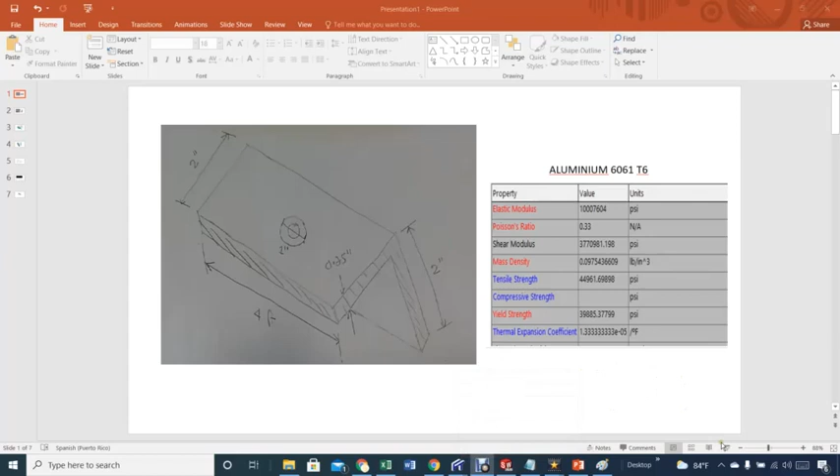All right, so here we are. We're going to design our L beam. Let's put this on slide mode. Let's see, there we go.

So here we are. We are designing this L beam in this fashion. Both ends of this aluminum beam will be fixed, and there's going to be a hole right through here where we'll put a bolt, and that bolt is going to be holding about 1,000 pounds weight. The dimension of this beam is 4 feet in length, and it's a 2 by 2 with a thickness of a quarter of an inch. It is an aluminum 6061 T6 with a yield strength of about 40,000 psi.

So that's basically what we have, and we want to see whether this L beam, the way it is with the properties and its characteristics, are enough.

This here is sort of like a washer. The bolt goes right through here, right through the hole, and let's look into that. This is another view of what we are saying. Here is kind of an eyebolt that is going to be connected right through here. The diameter is about 3/8 of an inch, and the washer is about 1 inch. So we have 3/8 right here, the diameter, and 1 inch right here, holding this 1,000 pounds.

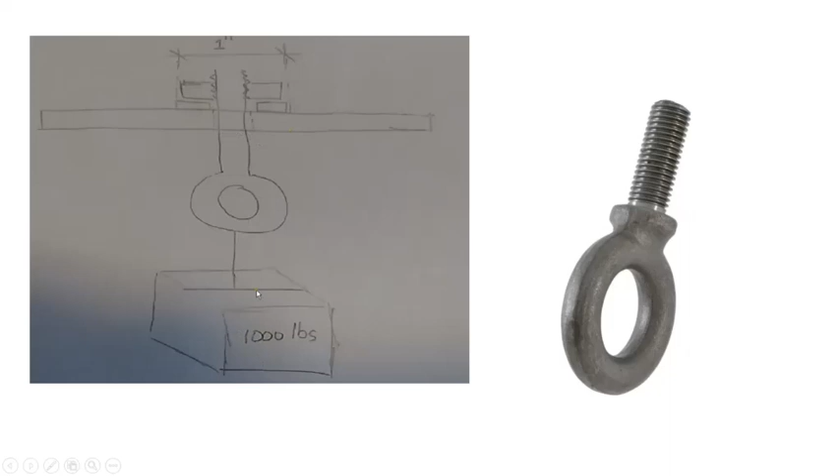So that's basically the idea. And again, check this out, right? Because gravity goes this way, so that when we do our analysis, we don't get lost. All right, so basically the idea is to do the analysis on SolidWorks and see what the stress will look like when we submit our L beam to that force.

So, deflection. Talking about deflection, depending on what code you look at - this is kind of interesting - the International Building Code calls for L/240 for deflection. Obviously there's some important conditions where we want to be sure there's pretty little deflection or none at all, like supporting plaster. Then that has to be L/360.

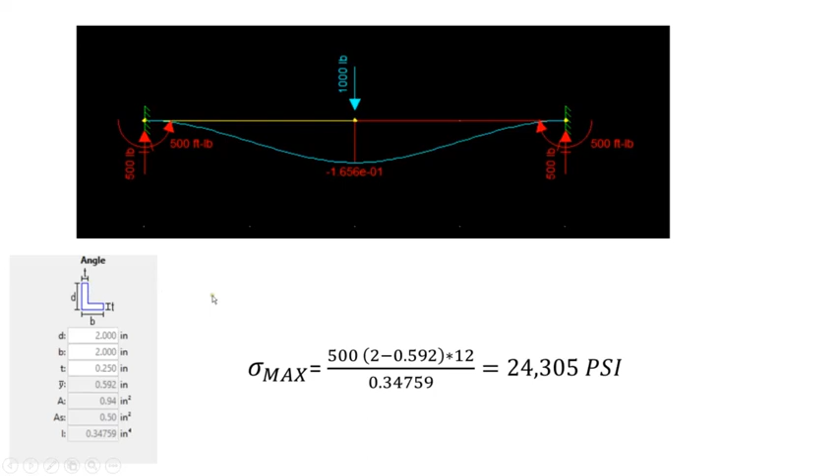Now, if you do the analysis for your stress, that would be about 24,000 psi. Based on the fact, remember, the centroid is 0.592, and the maximum - so that would be somewhere here. So the maximum distance is up to here. So this part will be subjected to very high stress that will come out to 24,000, which is kind of close to the 32,000 that we got for

the SolidWorks analysis. Remember, gravity is going this direction. So you think about it, at the end of this line here, there's going to be a lot of tension. And so tension here, and here in this part will be compression. So you have tension, more tension, and finally compression right along this line.

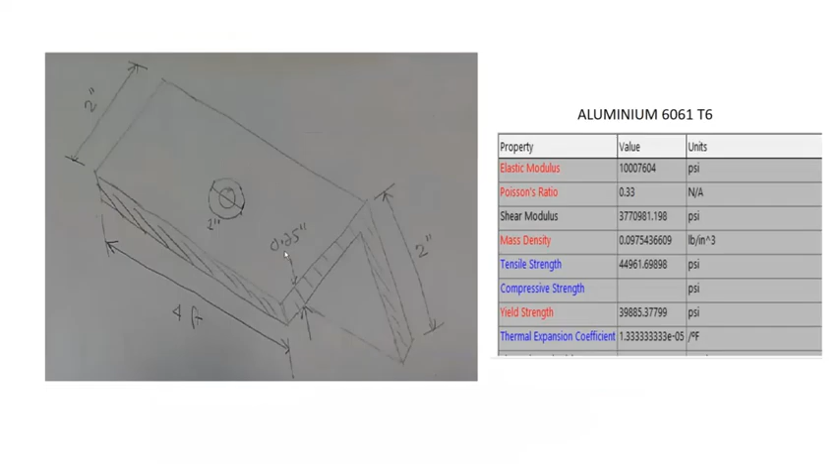All right, so let's see. Anything else that I should say? Well, actually, nope, we are in pretty good shape. What we should do now is take a look at how we do this type of analysis within SolidWorks. Let's do that. Oh well, here we are in SolidWorks.

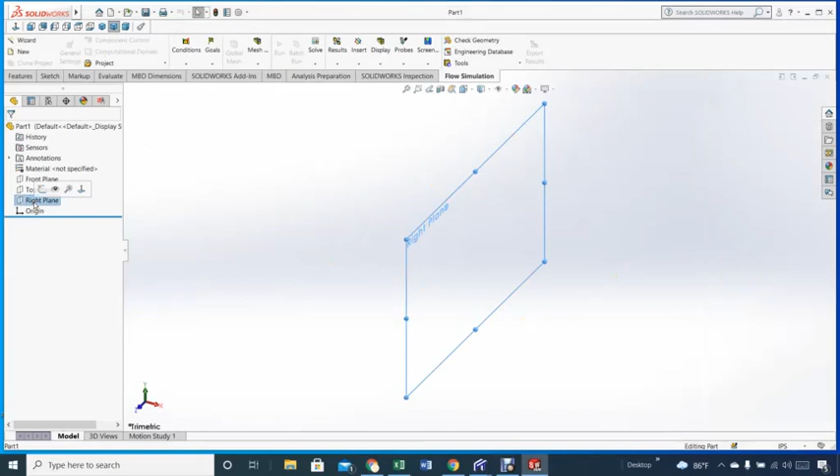Let's see if I can construct my L-beam. Let's see what would be a good start for this. Maybe a right plane - yeah, that might do. Right plane, so let's start with that.

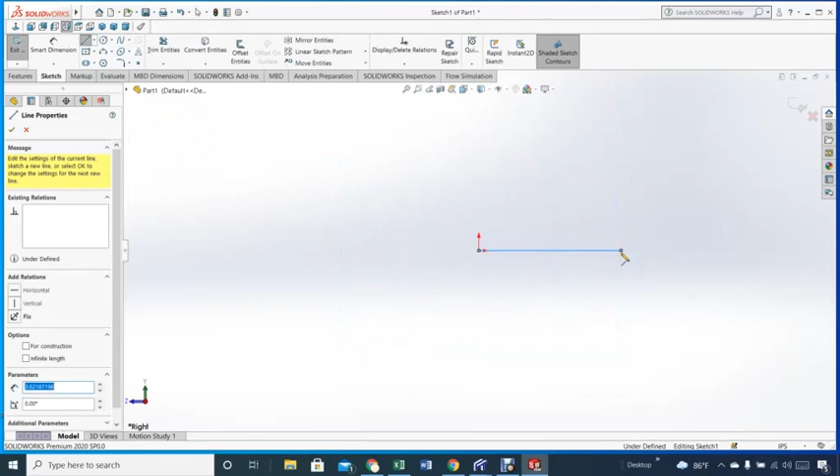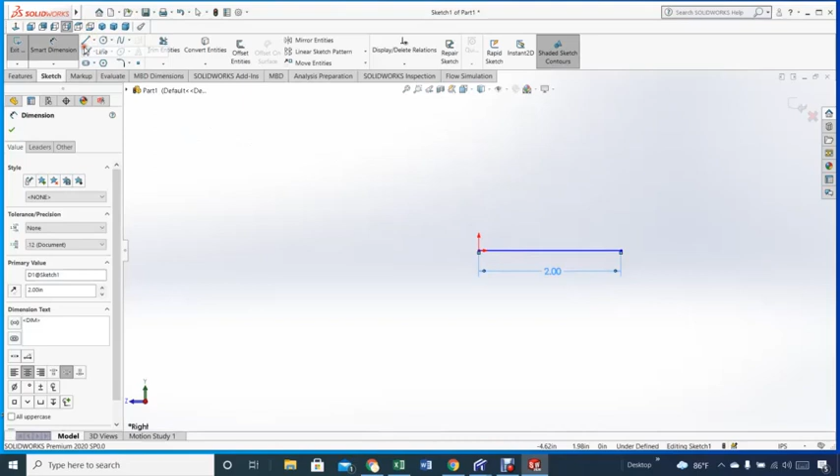And let's see, let's put a line. Let's see how this will work. All right, let's say that line will be about 2 inches, and we do another one from the center up.

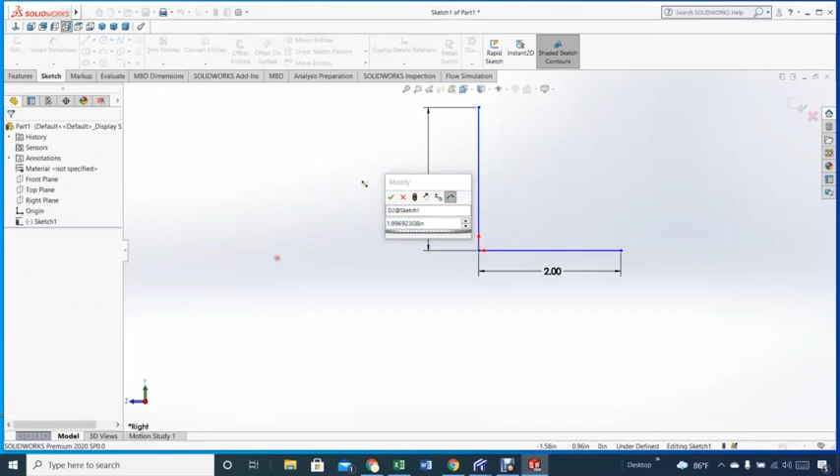All right, I think that's 2 inches as well. Let me double check. That looks good. Yeah, 2 inches. Now, oops, what happened here?

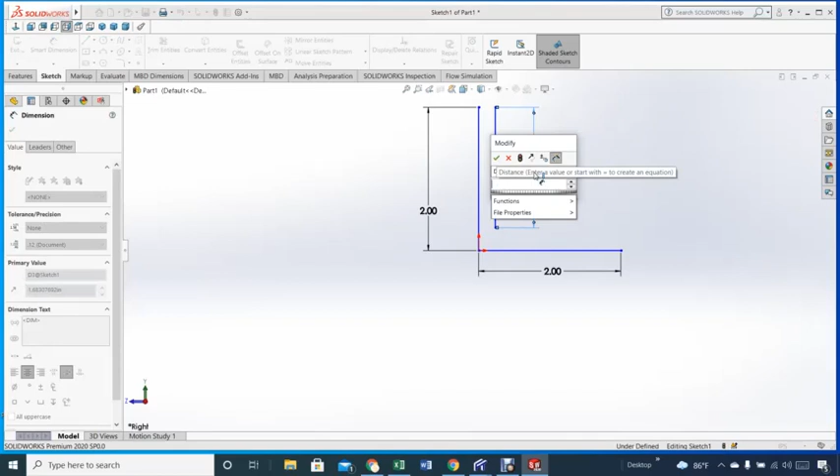Now let's throw another line here. And good. Let's leave it somewhere here. That line, the length of that line should be, since we want a distance from the bottom of 0.25, that line should be 1.75 in length.

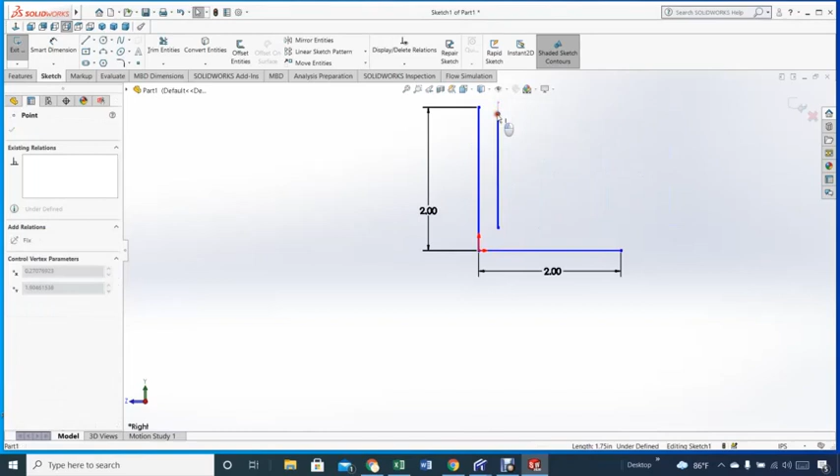And so let's move the line. Let's see if I can move it, because somehow it's fixed here. Always gives me some trouble. Let's delete the line again. Let's see if I can move it. There, but somehow, let me see if I can get this right.

That's the problem. That one should be 0.25. And now let's see if I can move this up. Oops. There we go. Now we're talking. So close. Let's close the guy. Let's see if I finish it.

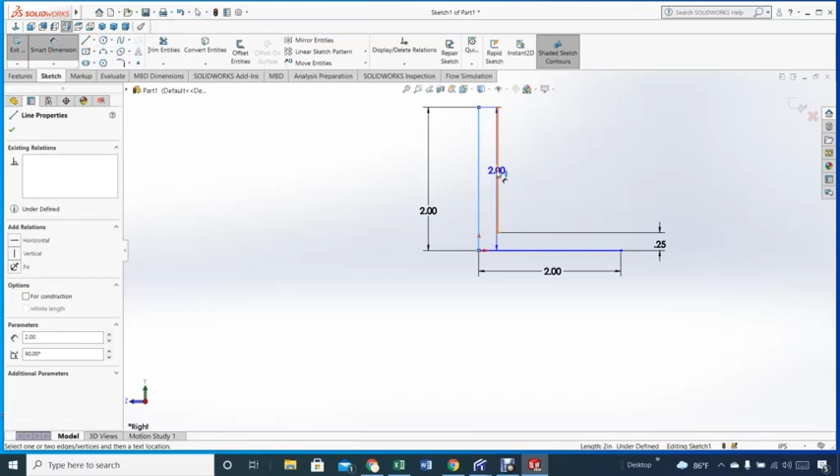Now the only thing that I need before doing that, actually, let me be sure that this is where it's supposed to be. That should be 0.25. And it looks good.

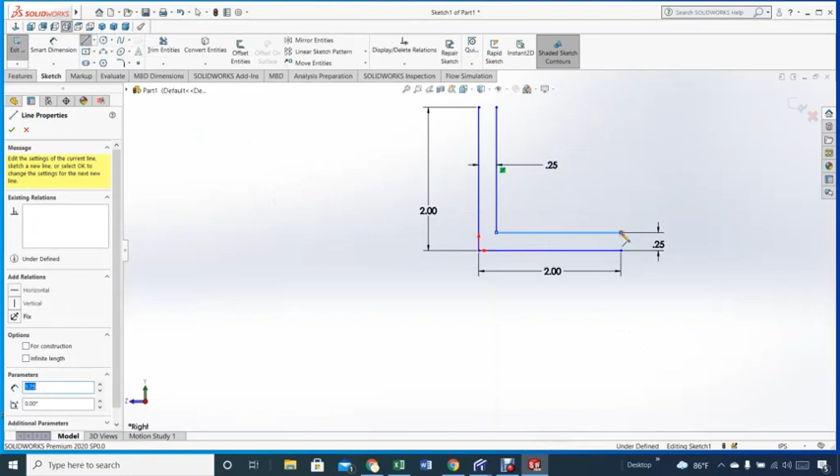Now another line, up to there. And now another line up to here. I think it's getting almost done. Another line from here to here. Excellent. Now it's close. So we got all the dimension. It's about 1/4 inch thickness. And everything looks good, so we accept that.

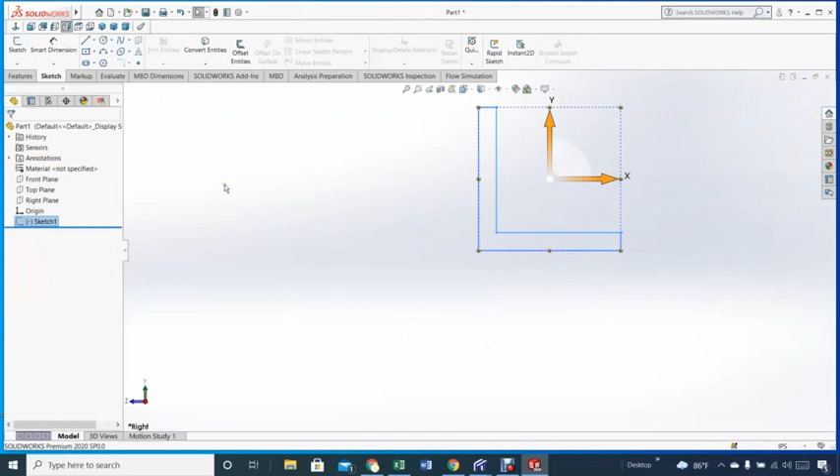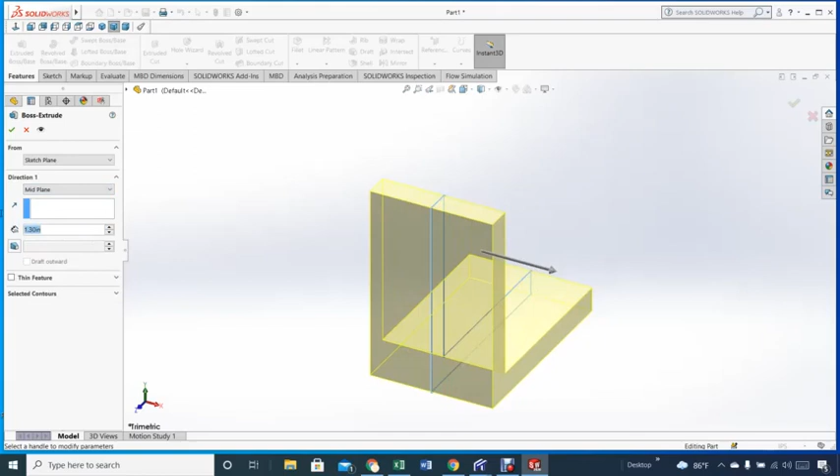And how about if we go feature, extrude, and it can go either way. Actually let's keep, I don't know, mid plane, and that would be 2, that would be so it's going to be 4 feet, meaning that we should go, like for example, that would be 24 inches. Now let's get this side to fit, so I know what I'm doing. It looks good, so we accept that, and we rotate again.

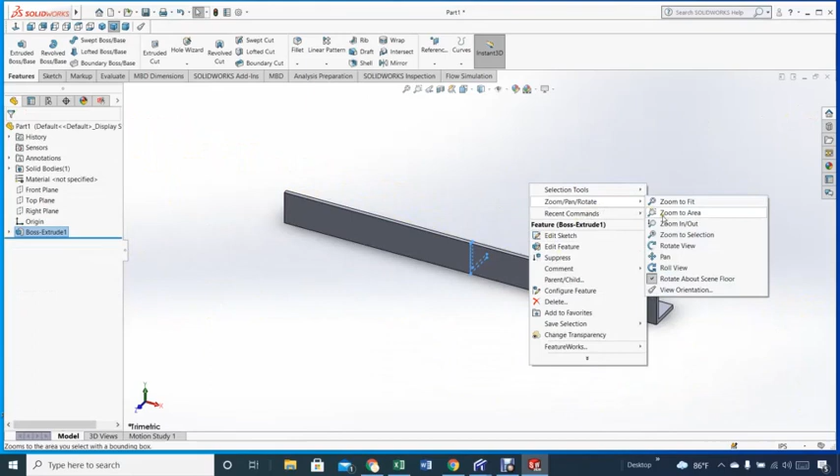Let's see how this looks like. Yeah, we got our beam pretty much designed the way we want it.

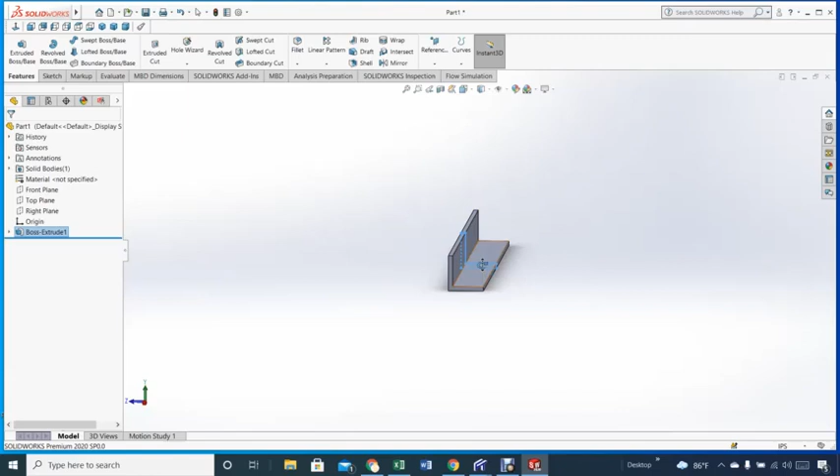Well, the issue is that the force here will be in this direction here, in one of the beams. So this beam will be fixed, and this is going to have a force going in that direction. It doesn't matter what is up and down, just to be, but what I'm saying is that you have to be sure, depending either side, because they are equal. So like for example, this side would be, if this length here is longer, then you have to be careful where is the hole according to your original drawing. In this case it will not matter. So I can put it here or here, where the bolt, the eye bolt, will be, hook up for the weight, for the force that will suffer when we do the analysis.

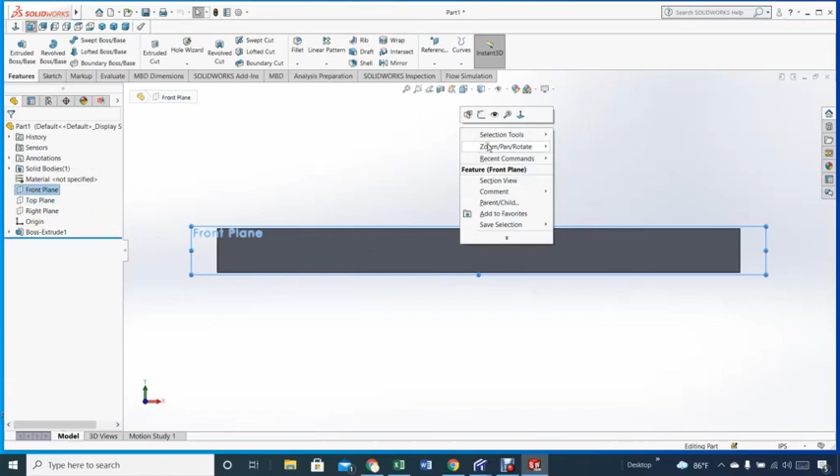Now, let's see. And this is the part that is important. Before I do anything, let's go top plane. Let's see, front plane. I think the front plane will do. Let's see, rotate. Yeah, front plane will do.

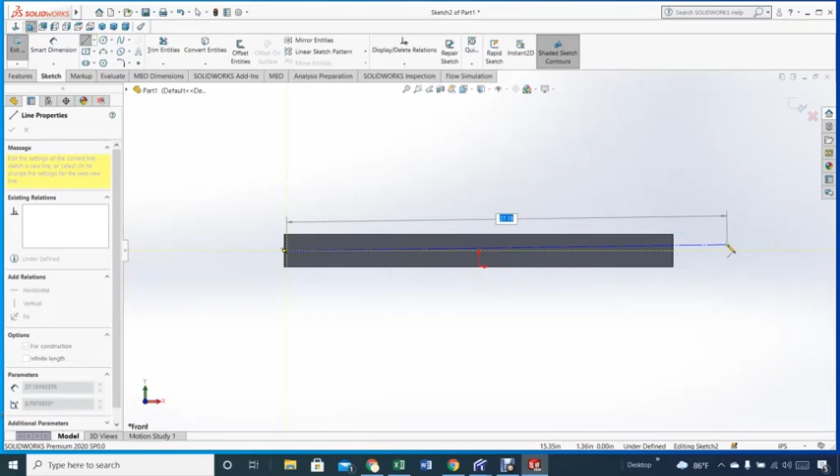And let's work on the front plane. Let's do sketch on the front plane, and let's add some line here, just so I know what I'm doing. Good. Now let's see. Actually this will look better if I get this right where it's supposed to be. Let's see if I can fix this.

Good, how about this one? There we go. Now I have the middle, and that will do, because then the next part will be right here. We're gonna add a circle right in the middle. That will do. And so that one, actually let's make this bigger so I know what I'm doing.

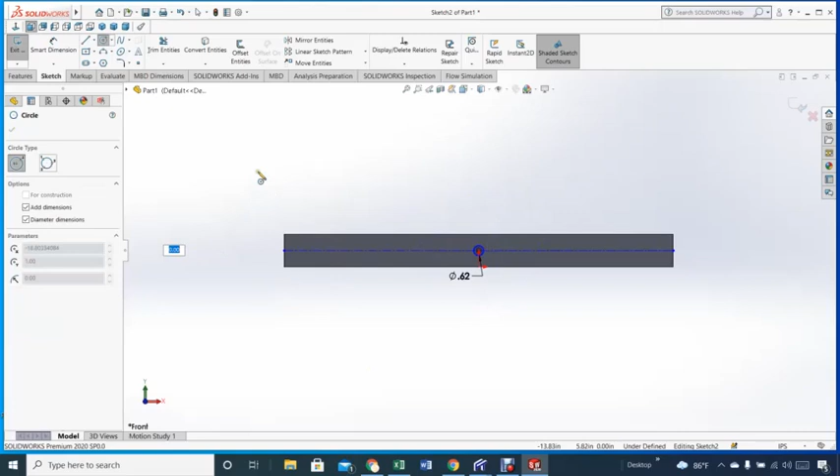Let's see if I can, escape. Zoom, let's zoom this out. That should be a 3/8 of an inch for a hole, 0.375. Let's accept that.

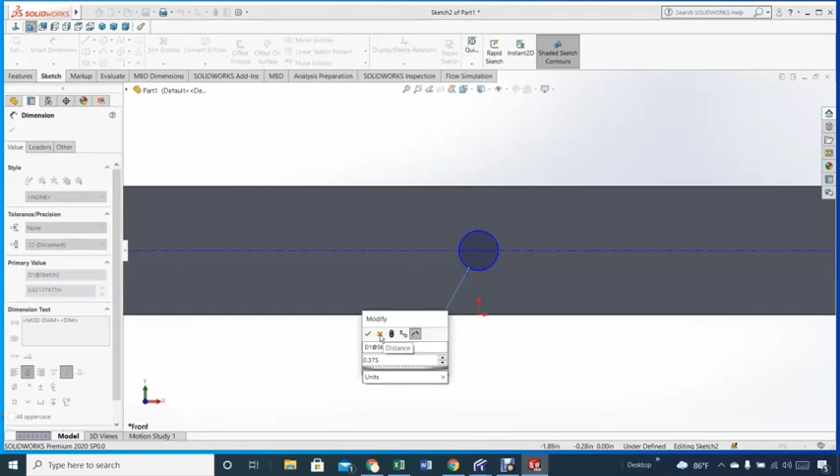And let's do, yeah, we'll deal with that later. Let's do now the washer. So let's do 2 more circles. Let's do a big one, which is about an inch, and let's do another one that is slightly larger than the hole.

That will do. All right, so let's fix this one definitely, and let's put that in 1 inch, and that's it. So we got the inner hole and the washer outside, and there's not a washer yet, but eventually is where the force will be concentrated, and that's very important.

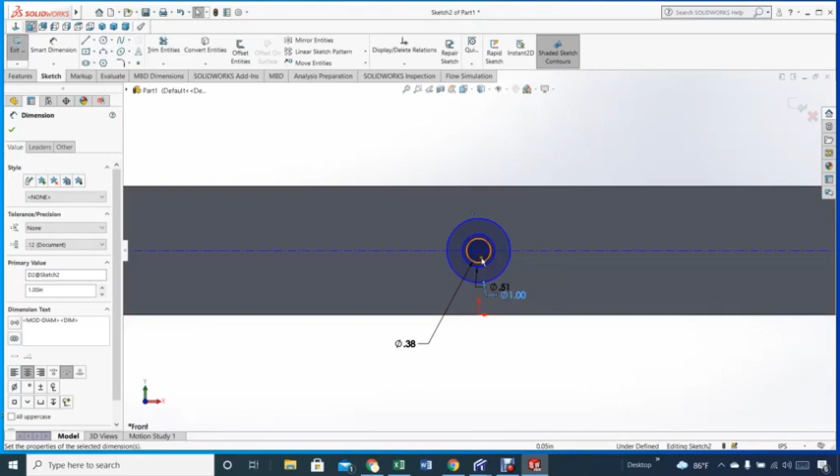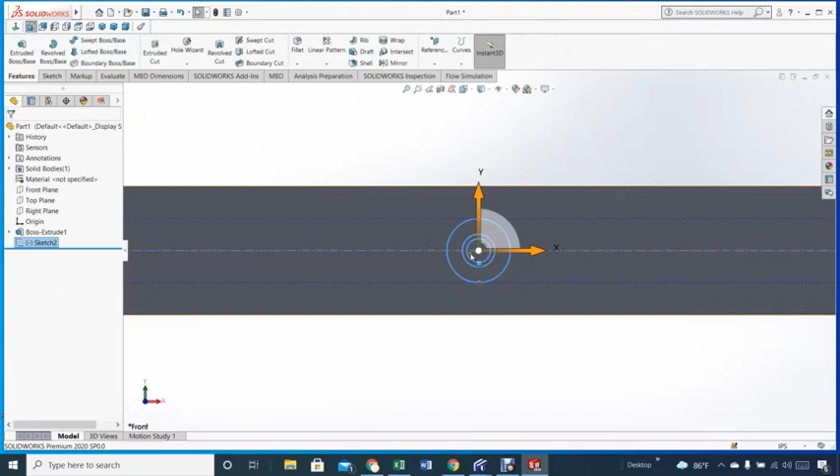So let's do here what I have to do now. Accept this, and let's go through. Let's do quickly here. Let's see, let's go to features for 1 second, and let's do one thing. All right, let's do a through cut. Let's see how this looks like.

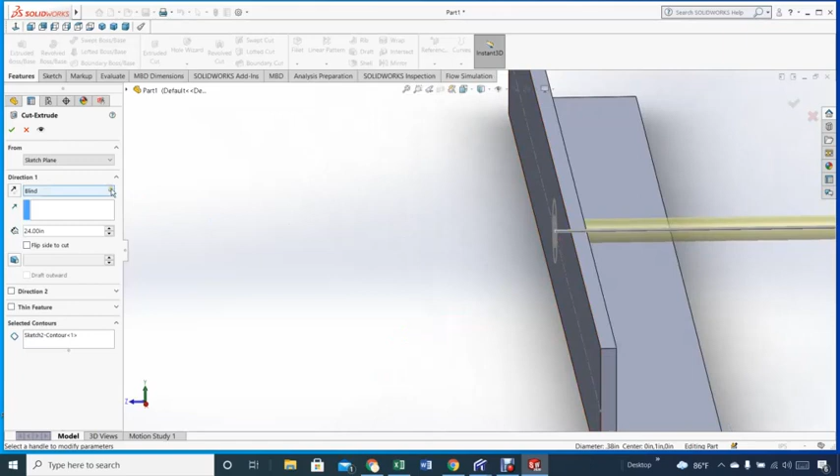And now let's rotate this so I know what I'm doing. Okay, more or less. All right, so I can certainly do mid plane, and it will cut through, no problem. Accept it, no big deal. So let's see, rotate. There we go. See, that's for the bolt, and the other part is for the washer.

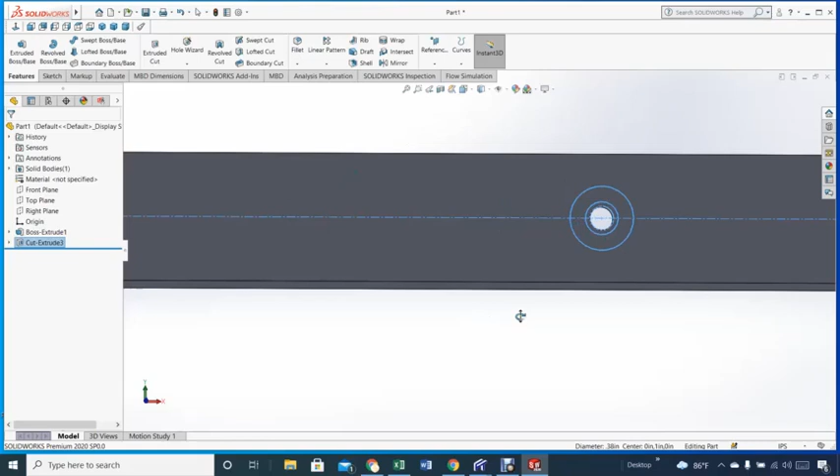And that's the important aspect of this. So we gotta be sure, we wanna be sure that this is spotted right versus the total area, because the force now will be concentrated around the washer, okay? And this hole will be sort of like a weak spot because you make a cutoff out of the beam, or inside the beam. So let's do that.

Let's zoom out again a little bit. Let's see. And let's do here what we have to do. Let's see if I can go back again to my sketch there. And what I have to do here is, let's see if I can pick first of all.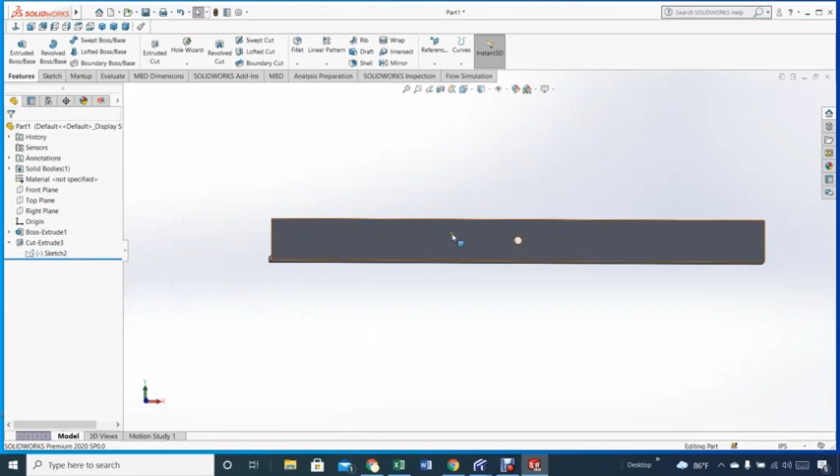Sketch. Let's see if I can do this larger. I'm using a regular mouse, so life is hard when you have a regular mouse. So let me see if I can do... the identification is right there.

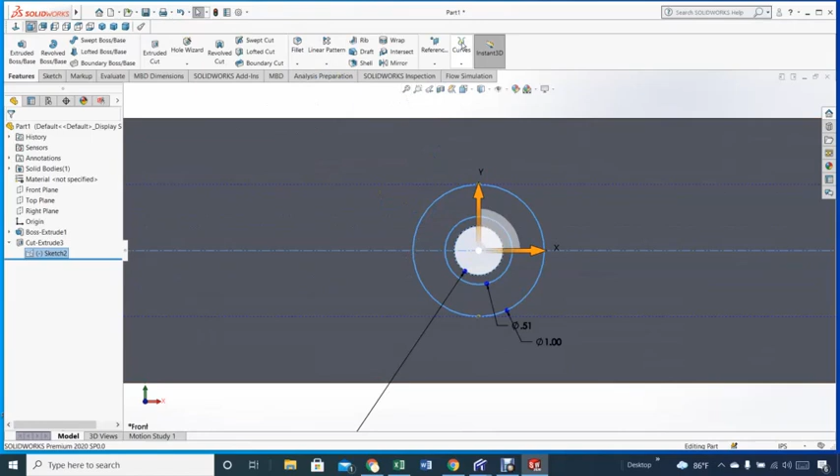Now let's see if I can do the split line. It looks like it's projecting right. This is one color and these two have the other color. Now the face, it seems right as well. I would say that looks good. At this point, it looks good.

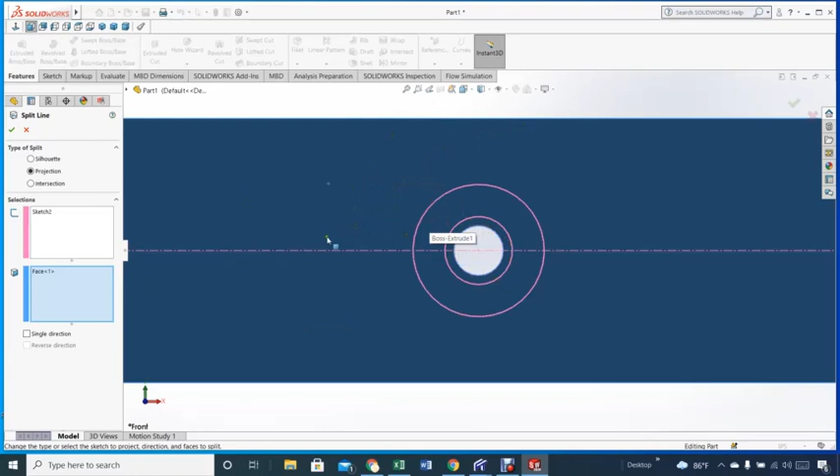So using the split line, the part of the silhouette is getting the silhouette right, and the face as well. So the only thing that I need to do is just accept that, and I think we're pretty much ready to do the analysis of this. Let me redo this part here, and let me mess around with this a little bit.

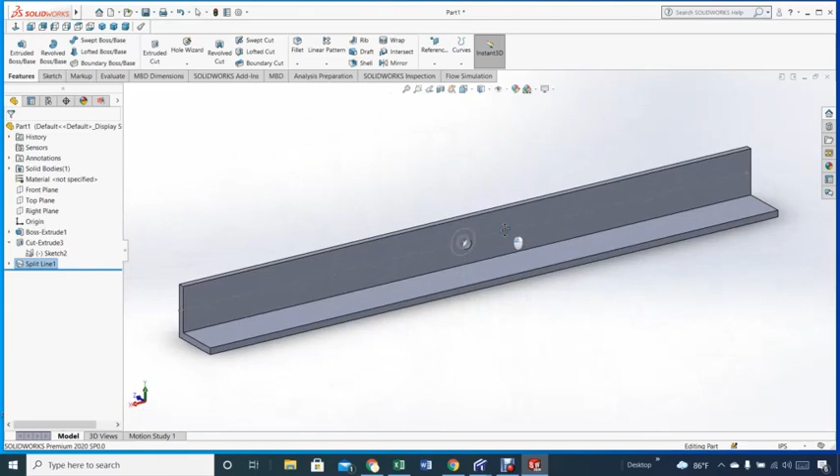Let's rotate. Yeah, you can see the silhouette of the spot for the washer, and so everything looks good.

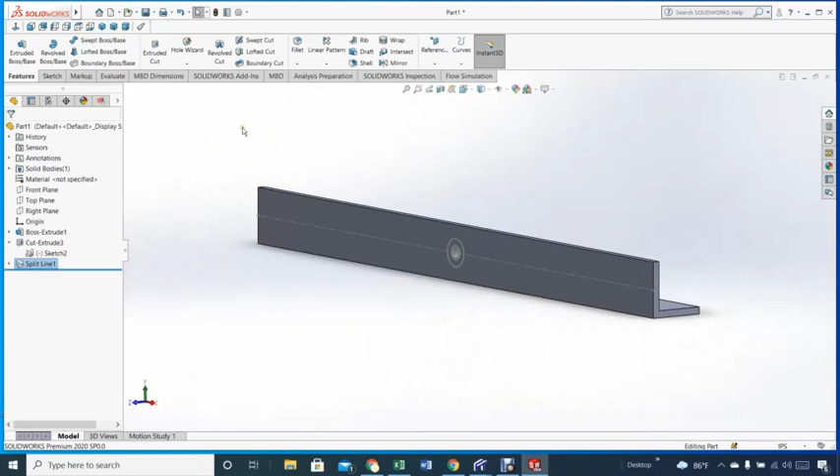With that said, I think that what we need to do now is basically do the simulation part. Let me get out of here, and let's see, we go to... and then we do, I think that we are pretty much done. I'm waiting here. There we go.

Simulation, how about new? Actually, one thing I haven't done is select the material. I will select it now. Don't worry about it, so let's say static. It's okay.

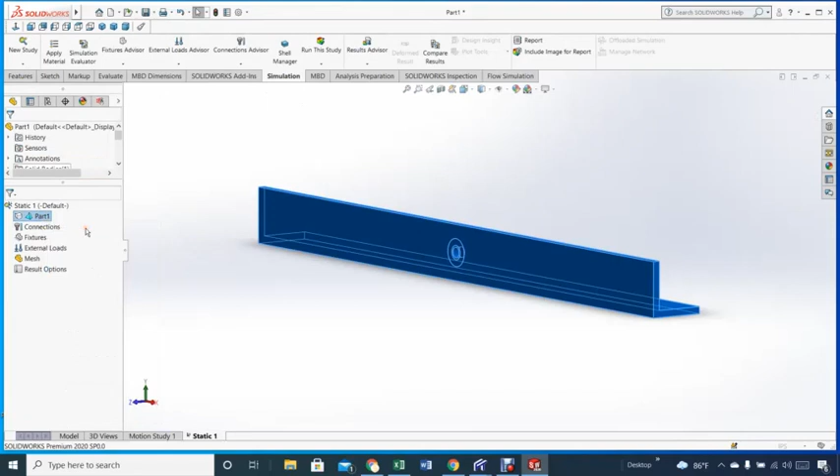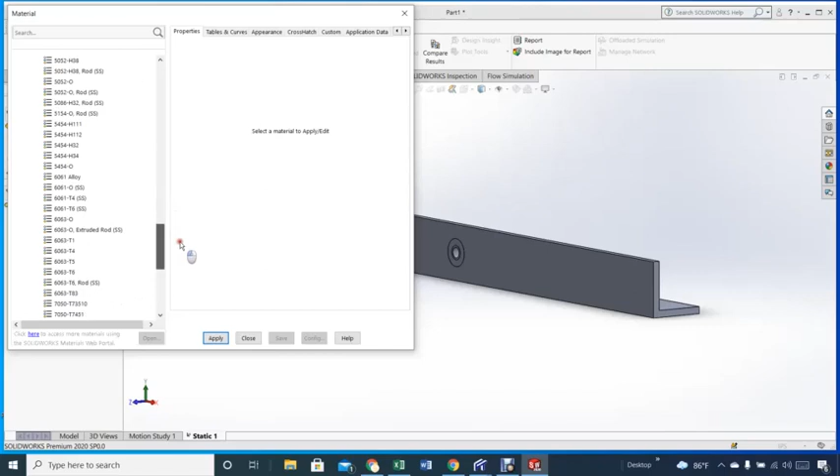And how about if I edit the material, and what is it going to be? It's going to be aluminum alloy. And which of the alloys are we going to use? Let's see... 6061 T6 sounds good to me.

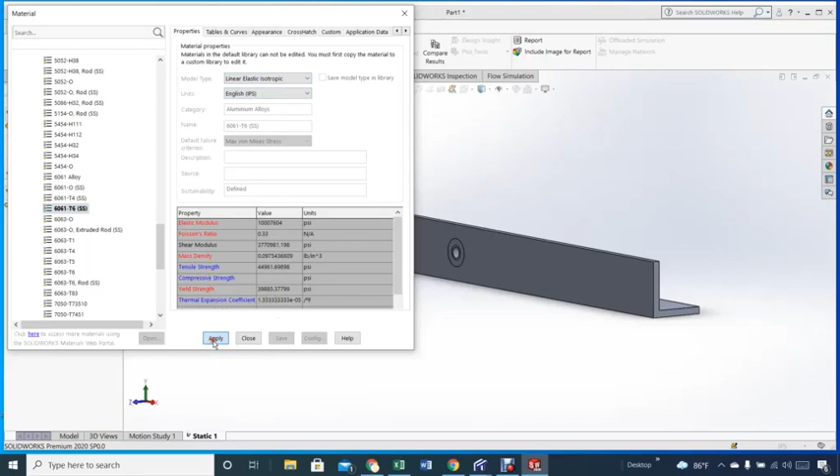Let's see, it's about 40... the yield strength, about 40,000 psi, the unit that I like, English. And that will do. Let's apply that, close, and now let's start with the features.

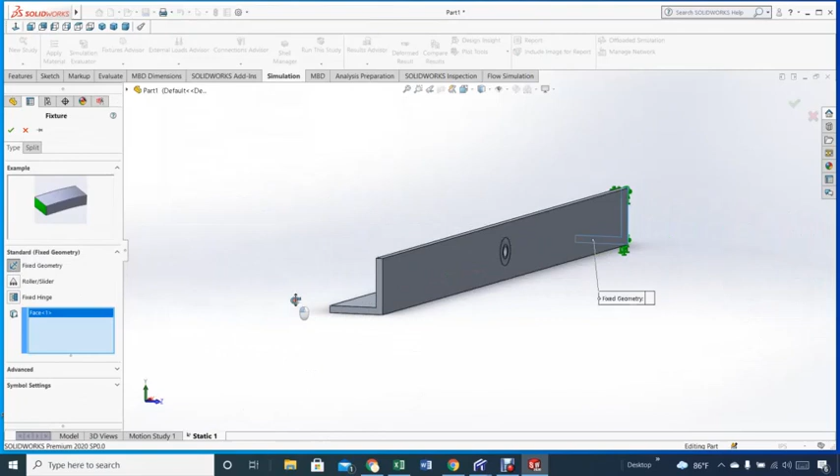Let's see how we're going to do this. Fix geometry—we're going to fix this part. Now let's rotate this, because we're going to fix this part as well. So now I've got both parts fixed.

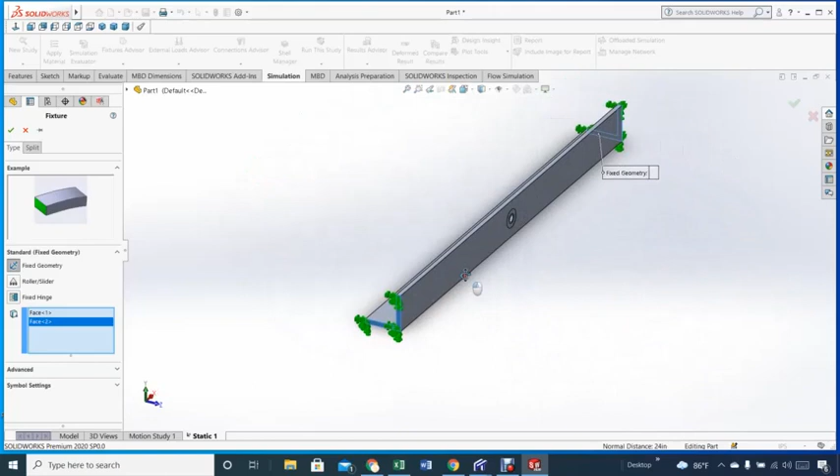Fix at both ends. Whoops. No, what are you doing? Get that out. There we go. Now it is face 1 and face 2 according to this. So we are in good shape.

Now let's accept that, and now let's see external load. This is the part that is important, what I did with the split line. External load, let's do a force, and the force will be in English units. And here's the 1,000 pound.

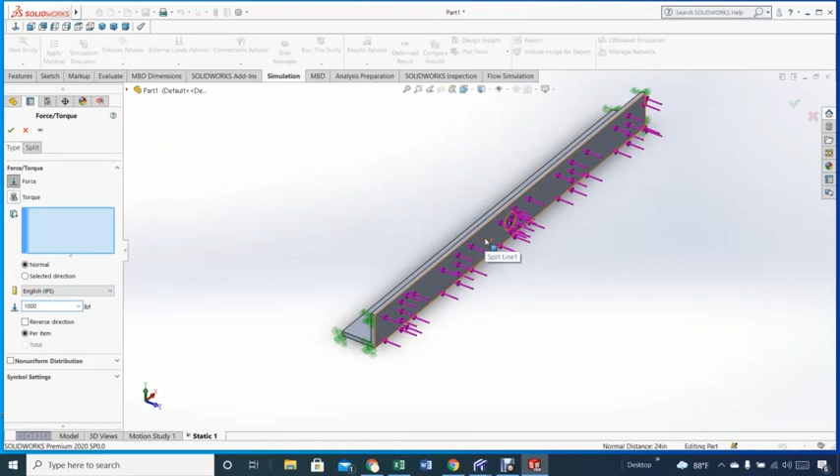The question is where the 1,000 pounds will be located. The whole surface? No, it's going to be... no, it's right there. See? So that's the beauty of this—it's a concentrated force right at the washer.

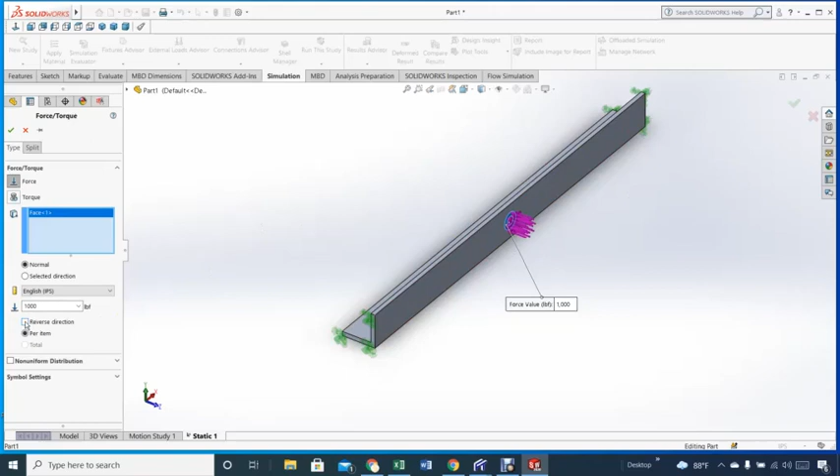If the direction is not right, you can definitely change the direction. And that would be through the bottom of how you fix the surface. So that's how we're going to install the beam, so the force is toward this direction.

All right, so with that said, I think we are pretty much done on this. It is fixed, we have the spot. The next part is the mesh. Let's go to the mesh for one second here.

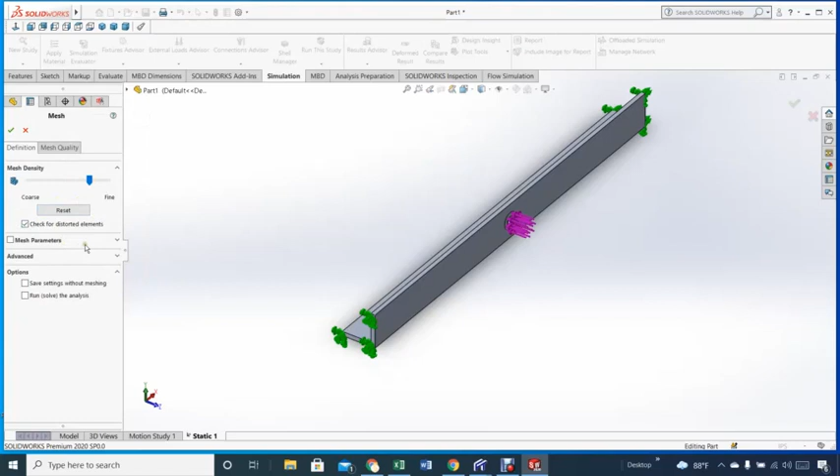And let's do create mesh. I like always to move toward the fine line a little bit so that it doesn't take too much time. Now, in terms of mesh parameters, blended is always good. How about this one? Everything else I'll leave the way it is. Accept that.

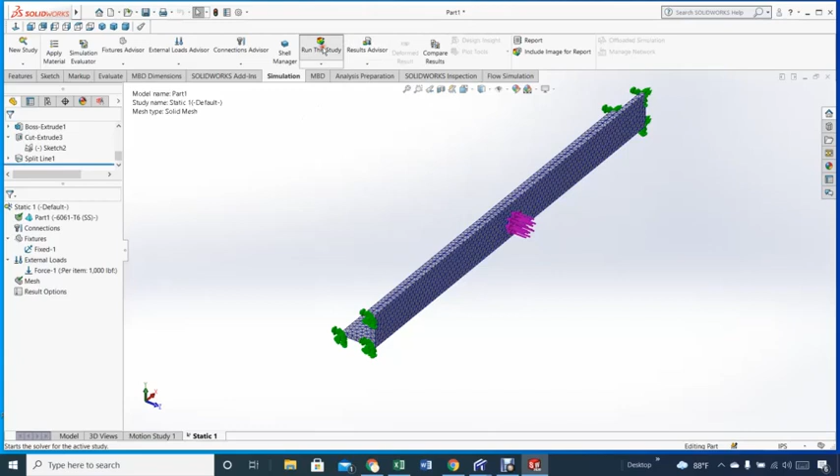We are done. And now, I think we are ready to run this study and see. It looks good—I like it because you can see that there's a lot of definition within the 0.25 inches of thickness for the L bar. Now, run this study, let's see how this looks like.

There we go. Well, it's interesting that I like the scale deformation is about 16, meaning that this is well exaggerated. But...

I don't like the unit, it's kind of confusing to me. So let's change the unit here for a second. Let's edit chart options, and start to mess around with this a little bit. So, show max annotation—I like to see that number. And what else do I need to look at?

I like to go with the yield strength better, and normal, scientific... let's use general. Now I have to change something else here. Let's see settings.

Definition... oh, here we go. I don't like that, PSI—that would do. And so right now it's about 40 KSI, and still looking into chart options.

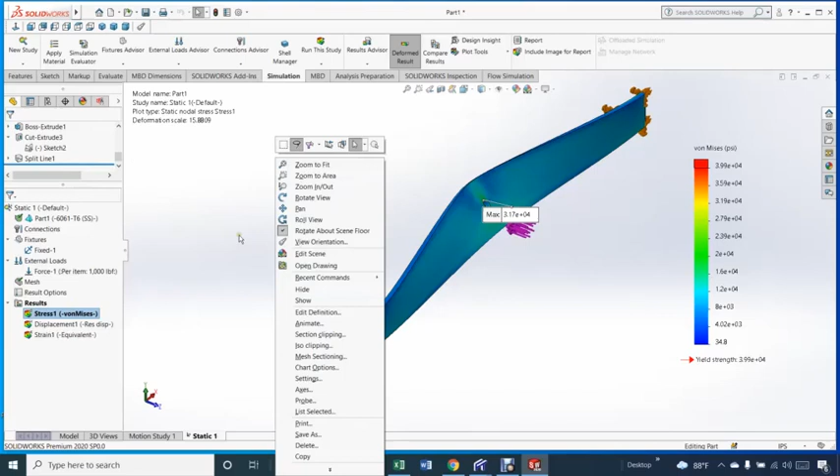Animate. Let's see, that was too fast. There we go. There's one spot within the hole for the bolt that is causing it to get close to the red, a red spot right there at the maximum. Let's get out of here for a second, and you get that value of 3.17, which means about 31 KSI, still below the yield strength of about 40 KSI.

So it's okay. Now how about the displacement? Let's see, displacement in millimeters is about, let's see, can I change the unit to displacement? Edit definition. Of an inch. Yeah, 0.15 of an inch, which is perfect. It's pretty much what I calculated from the other system.

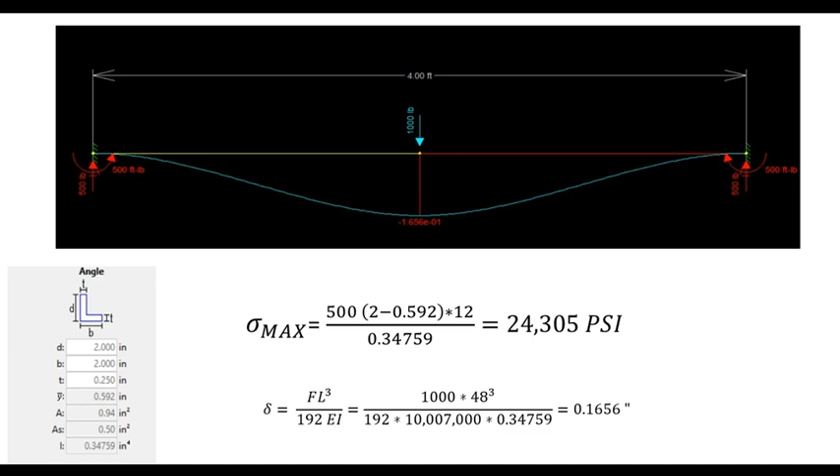Let's see, the hand calculation showed that deflection will be about, did I get the number? I think it was 0.15. If I record that, between 0.14 and 0.15 of an inch, which is perfect. Actually, the hand calculation for deflection shows a value of 0.1656 inches, slightly above the Solidworks simulation value.

But everything else looks super. Very little deflection, although well exaggerated here just for animation purposes, but it looks good. Actually, let me do one more thing here. Chart options, let's see what I got. There we go, looks much better now.

And let's see, I'm looking for, actually here, let's see, chart options. Okay, looks good, nothing to change there. See definition. Okay, settings, this is what I like: superimpose the original model so we know how that looks like.

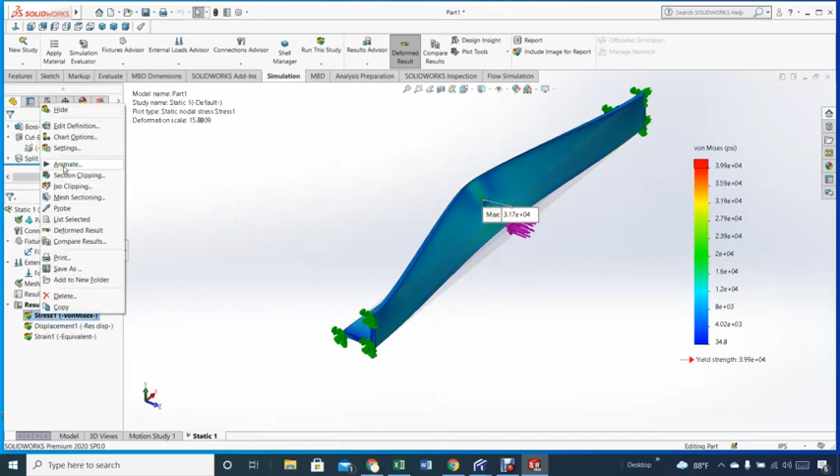And let's see if I can. Let's see. Yes, the original model is right there, it sort of looks like a shadow. Let's see. Animate, and you can see it against the shadow how the deflection looks like.

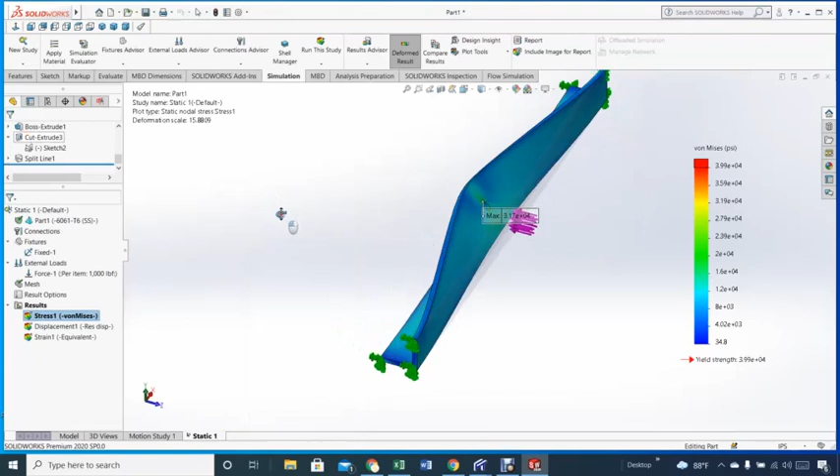And let's see what else I can do. Let's see. Okay, let's stop this for a second and see if I can rotate the view so it could get better. There we go, that's actually better, just to see the effect of that force over that surface. The exaggeration really killed me, it's like wow, you get scared when you see so much deflection, but it's not.

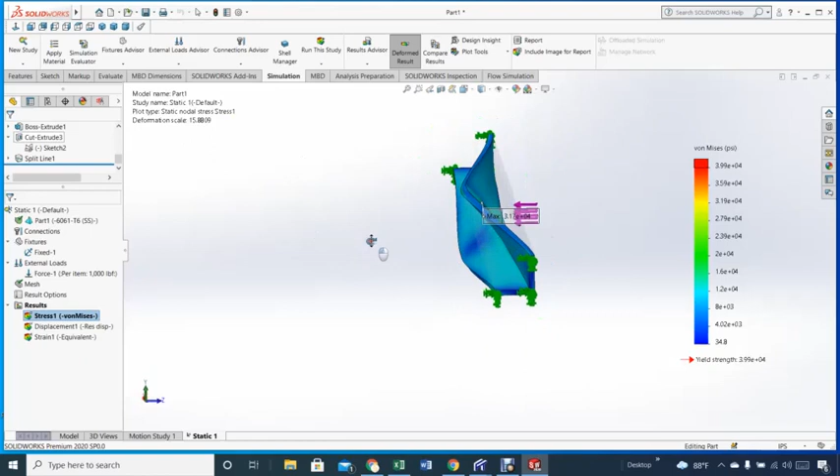It's just part of the illustration, how things are being deformed. That's about 1,000 pounds, which is a lot. That's almost like a very heavy, I don't know, thinking about an engine, a 600-700 pound engine, meaning it's a truck engine or something like that, cannot be a car engine. But let's see, I think that will do.

Let's do the deflection study there and see how this looks like. Stress again, animate. So this is what's happening. See this part here as well, bending, but it stays on the blue, so very, very little. This is the stress on the unit, very little, it just stays at about 8,000, not very well below.

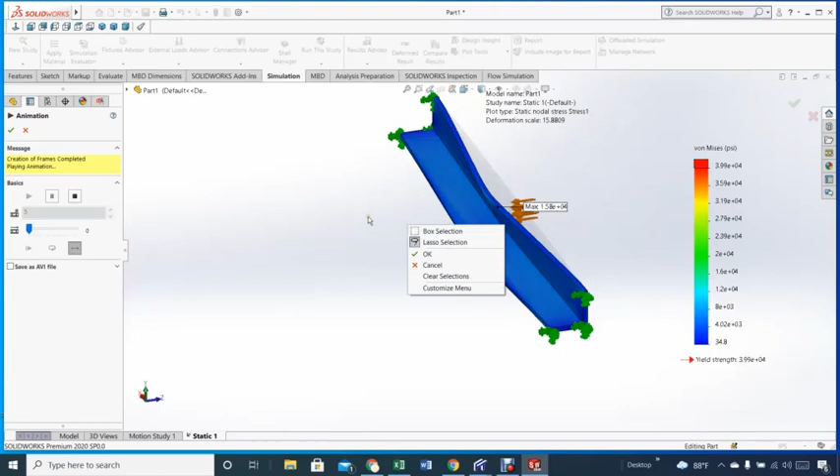Only the red spot is seen very little here, which is getting close, but it's not that big a deal, still okay. Let's see, let's rotate again. This, I don't like that one. This one, sorry, there we go. So the maximum is about 31,000, but the yield strength is 39, 40, I would say 40. So it's perfect.

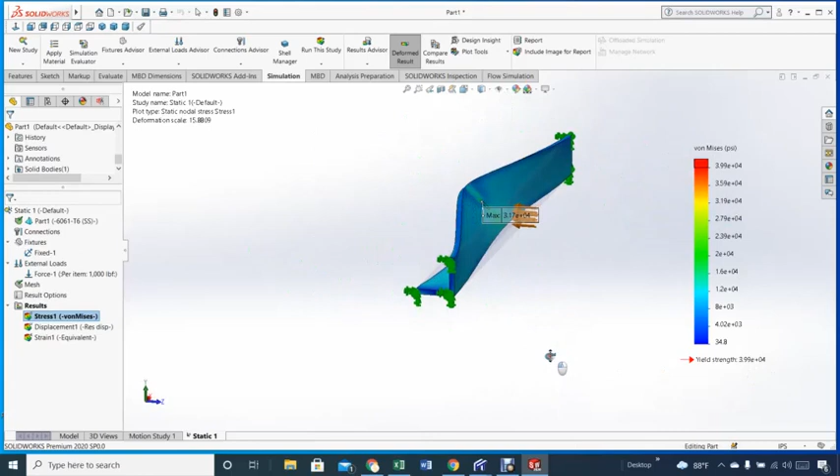Nothing else to consider, except if you find that this deflection is way too much for you, then you can either increase the thickness of your L-beam here, which is about 1/4 of an inch, or change the material you're using. In this case it's aluminum, 6061 at T6. And basically, that will do.

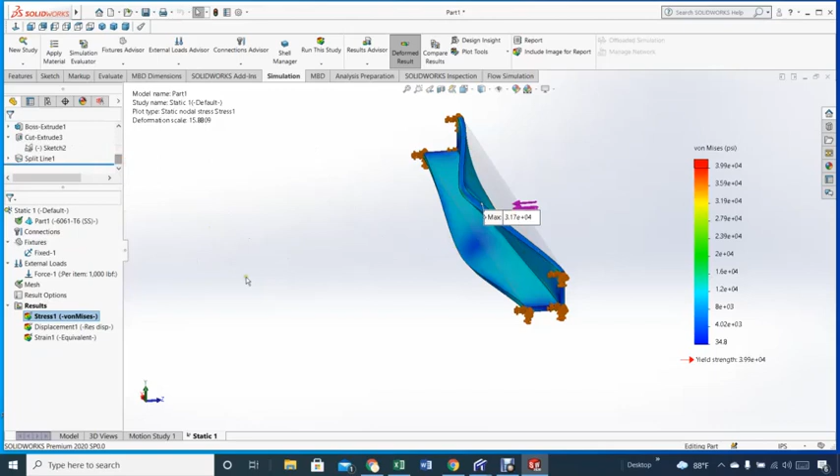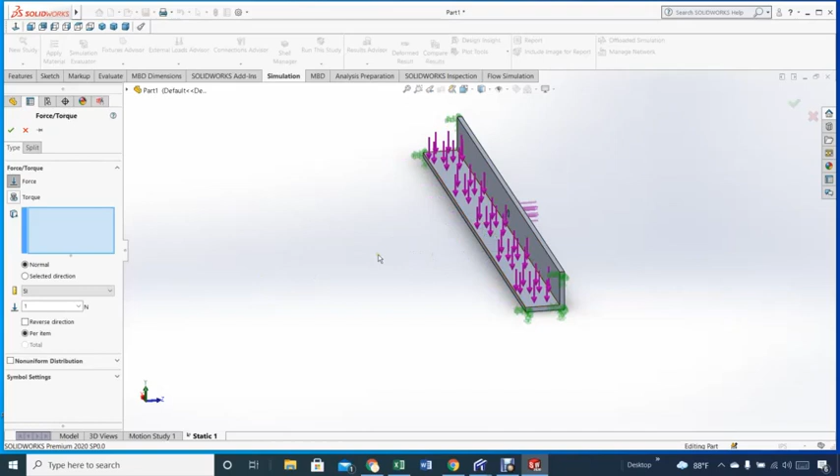The next video I'm planning to show is what will happen if, let's get back to, let's see, to the original, my original design. Let's go back to, there we go, just for: what will happen if instead of the force going this way, you make a hole here and the force goes that way. So the force is within the bolt, on one face of the bolt, and that's a different story. So I have to do a split line within the inside of the hole here.

What, this is kind of confusing, let me start again. This is what I'm saying: let's say you have your L-beam the way it's shown here, but then you make a hole through the L-beam and that hole will be in shear. So you put a pin like shown here and the 1,000 pounds will be pulled down. However, that will be at the face of the bolt, meaning I have to do a split line to ensure I get this right. So this pulls down on the L-beam.